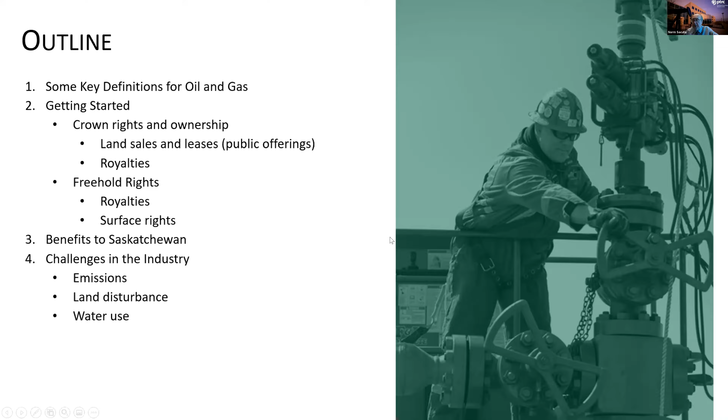So, a few of the definitions. First of all, if you go to the PTRC page, this is a link — we can send this out to people after the presentations are over. We have a glossary of terms at the PTRC.

Now, we've only been working on this for about the last 8 to 10 months. It's been populated with some good definitions right across the industry. So if you ever have a question about something like an oil well, or what is CHOPS — cold heavy oil production with sand — it will be included in this glossary. Just make note of that; you can go to the PTRC page. That glossary will be world class within a year, I promise, but right now we're populating it with material, and it's a good start.

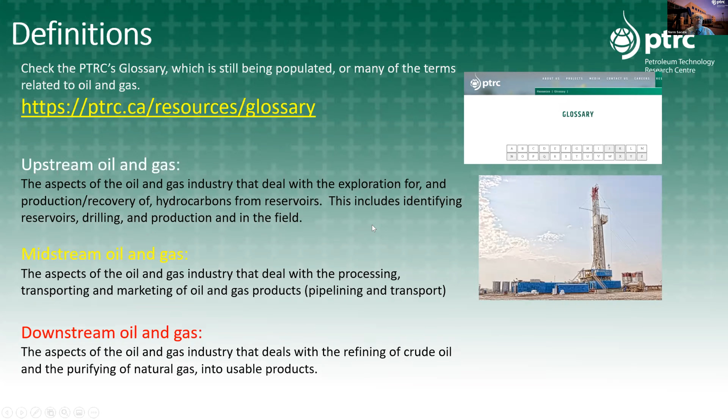So three of these definitions right off the bat are upstream, midstream, and downstream oil and gas. Some of you may have heard these before, but I'll provide a better definition. Upstream oil and gas is the idea of actually drilling the wells — what happens at the wellhead, what happens in the field to get the oil and gas out of the ground. So when we talk about upstream oil and gas, we're talking about exploration, production, and recovery from reservoirs. Midstream oil and gas, you could consider — although it involves other things — to be the transportation of materials.

So how you get that to market, think about big tankers going across the ocean, pipelines - that's midstream oil and gas. How do you get that to locations where it can then be further refined and upgraded? That's what downstream oil and gas is - the refining to finished products, and frankly, the sale of those products.

So when we're talking about upstream, midstream, and downstream oil and gas, which is often discussed across the industry and in the general public, those are the three things we're talking about. The PTRC and I would say SRC are most heavily involved with upstream oil and gas, although SRC, because they're interested in pipe flow and in improving the ability of pipelines to do what they're supposed to, are also involved in a significant way with midstream oil and gas.

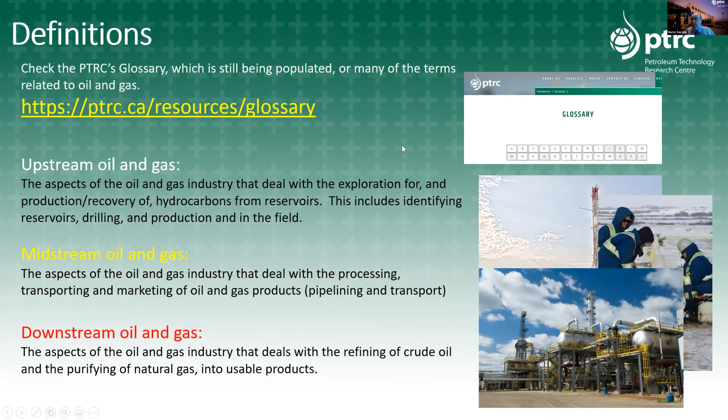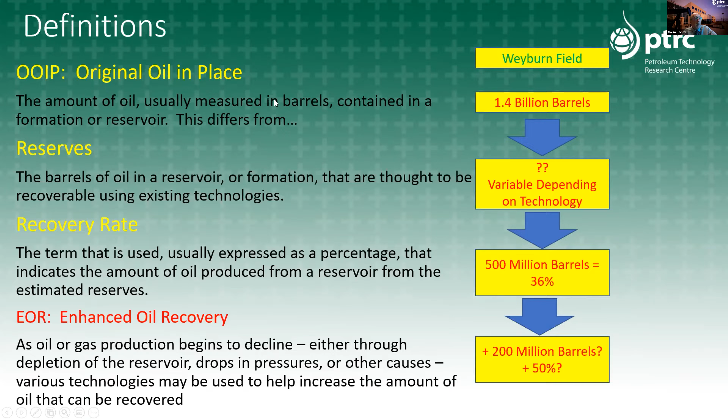So Weyburn has become a really world-class field that is being looked at, and I used it to basically provide examples of what these terms mean, if you're interested in looking them up further. Okay, so let's talk about Crown rights and ownership.

So basically, the government, or Crown as it's called - the provincial government of Saskatchewan - owns the mineral rights to the vast majority of locations in the province. About 80% of the mineral rights, what is underground below your land, is owned by the Saskatchewan government. Now that doesn't just include oil and gas, it includes potash, and increasingly really valuable commodities like lithium. The province is looking more and more at lithium because, of course, it's used in batteries to power cars, things like that. And they are finding lithium in some of the underground reservoirs where oil and gas is, or where there are deep saline reservoirs. That's also being talked about.

There's also helium - that's another commodity that's underground. We actually have a helium production plant now in southwest Saskatchewan because they were able to find helium in some of these underground locations. Now, as I've said, most of those rights are owned by the province, and the province decides to do what's called land leases and sales.

They make public offerings or notices posted at the Ministry of Energy and Resources site, saying this particular section of the province or area is now up for lease or for sale for exploitation, if it hasn't already been put up.

Usually larger companies make these bids, since it's hard for a smaller company to do this when it involves oil and gas. A company bids, saying we want to purchase the rights to exploit this resource and we're willing to pay this amount. The top bidder usually wins. If it involves oil and gas or a large area requiring a lot of infrastructure, pipelines, or pump jacks, it will typically be a larger company.

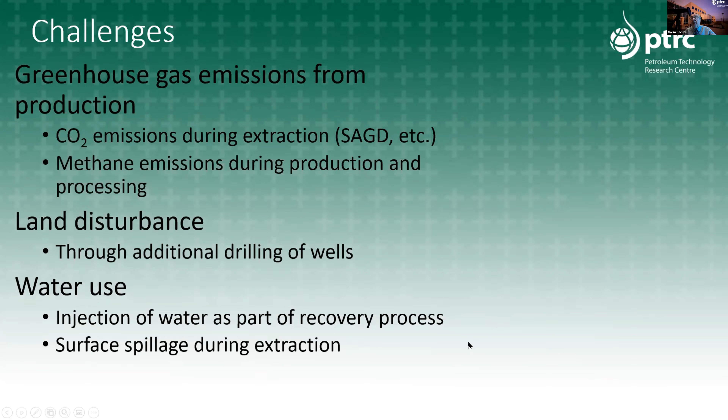Where you are using surface water, to eliminate that entirely would be the ultimate goal, I think, but rather to use water that's used at depth and at other locations. And of course, you don't want any of that very salty water being spilled at the wellhead. So that's another issue that is potentially to be looked at.

So that's it for me. And just a brief summary of what's coming up with the presentations.

Eric Nichols is going to be doing the basics about wells, how they're drilled, what's an oil reservoir, where are oil and gas located, and also touching upon enhanced oil recovery. We have Petro, he's going to be talking about EOR, enhanced oil recovery, and IOR, which is improved oil recovery, and also a number of definitions and other background information and information on the research that's being conducted at SRC.

And finally, we have Erica. She's going to be talking about methane and the research work that's being done at SRC to help mitigate some of those emissions, and also a summary about why methane is a particular problem. So with that, I'm going to stop sharing, and Eric, please go ahead and start with your presentation.

Thank you very much, Norm. I hope everyone can see my screen. I'm going to talk about a little more of the technical stuff than what Norm was talking about. That was a good background. Thank you very much, Norm.

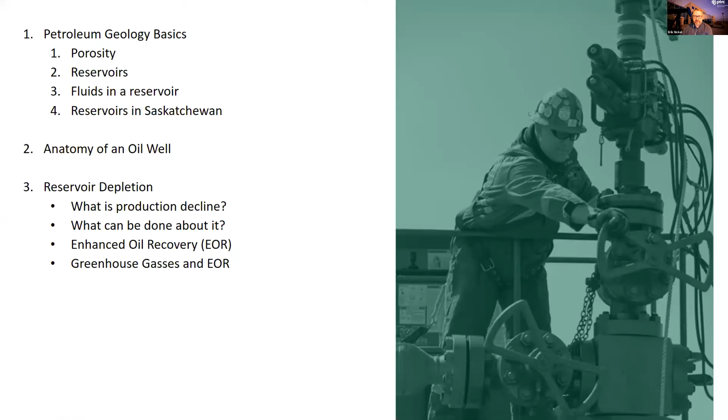Consider this continuing to drink from the fire hose on all things oil and gas in Saskatchewan. So I'm going to go through some petroleum geology basics of porosity, reservoirs, fluids within them, and where the reservoirs are in Saskatchewan, how you drill an oil well and what that looks like in cross-section. Also, reservoir depletion and EOR. I'll touch on EOR. Petro's going to really get into it a little bit deeper.

So reservoir rock. You know, we often talk about rock. I'm a geologist by training. I grew up looking at rocks and talking about rocks. There's different kinds as it pertains to a petroleum geologist. There's the kind that has no pore spaces, real heavy, dense rock. Think of a curling rock or something like that, but more likely a shale, something that fluids can't travel through.

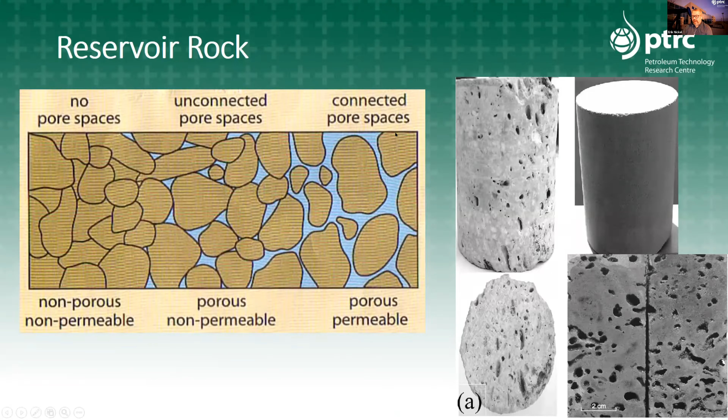But then you have this porous and permeable rock, and that's what you have oil and gas trapped in. If we were to take that little diagram and put it on its side and put oil down here, what you would have is basically an oil reservoir. You have rock that is connected pore spaces and porous and permeable like a sponge right underneath real dense, heavy rock. What does this look like in reality?

This is a core of a limestone that has these big porous holes in it. It looks like Swiss cheese, although it also may look like a sandstone where all the spaces between the grains of sand are all filled with oil.

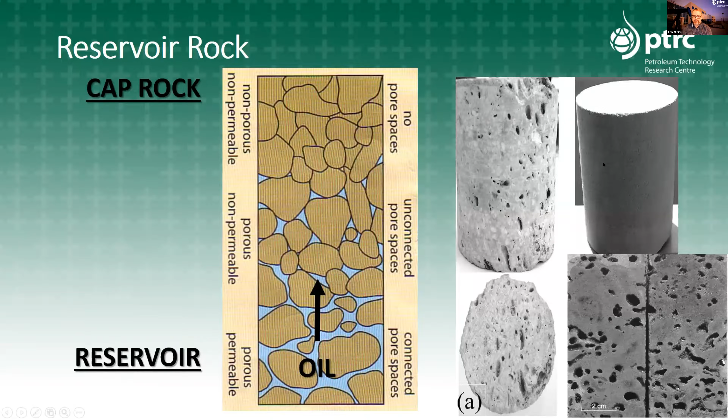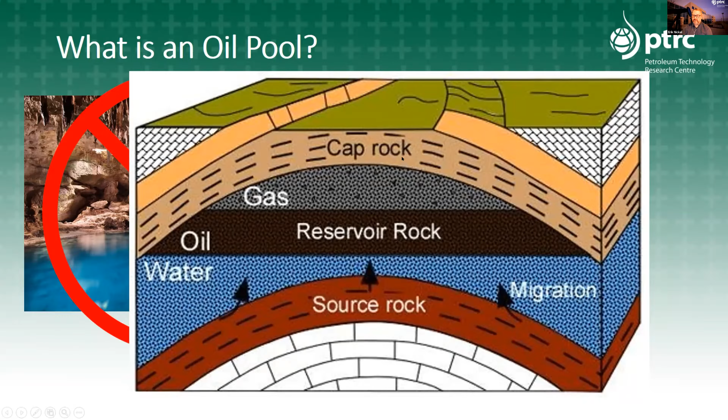So to access that, we have to drill an oil well. At its most basic, what you need to know about an oil well is that you drill a well and cement a metal pipe into it, then drill a bit smaller and cement another pipe into it called the surface casing, then possibly an intermediate casing, and then production casing. Each one is a pipe inside a pipe inside a pipe, each getting progressively deeper, and each using a lot of cement.

It won't flow up to surface usually, especially in Saskatchewan. You need a pump, and you've seen these nodding donkeys in the field a lot, but what you have to know is there's a sucker rod that goes all the way to the bottom of the well, which might be kilometers deep. It's a very long rod, and at the bottom is a valve that allows you to start slowly and gradually bring oil up to the surface, where the gas is separated basically at the wellhead, and you have oil production. So very many pipes and very many long pieces of steel, as I'm sure you've seen in the yards and on the trucks around Estevan, Lloydminster, and Swift Current.

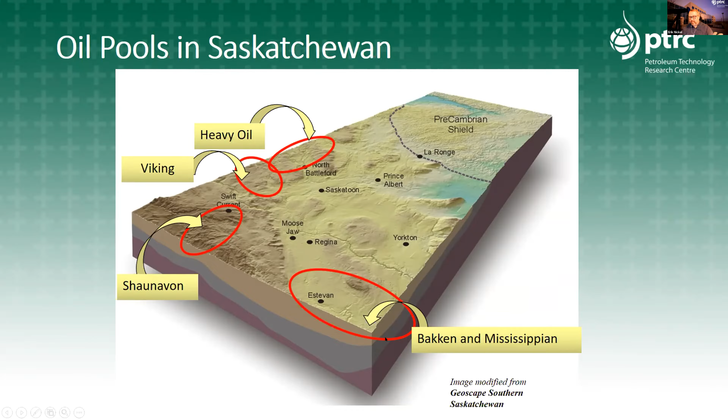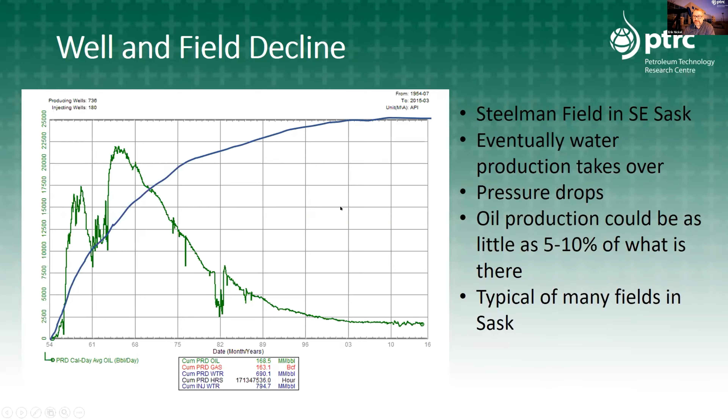And the price per barrel of water is not very good. So all of this water gets pumped back down into different wells trying to get more oil out. In southeast Saskatchewan, we maybe get 20 to 30% of the original oil in place, if you remember that term that Norm told you. But it can be as little as 5 to 10%. So imagine 95% of the oil remaining in this reservoir - what can we do with that? It's typical of many fields in Saskatchewan, be they Bakken fields or up near Lloydminster with heavy oil. So we're leaving up to 95% of it behind.

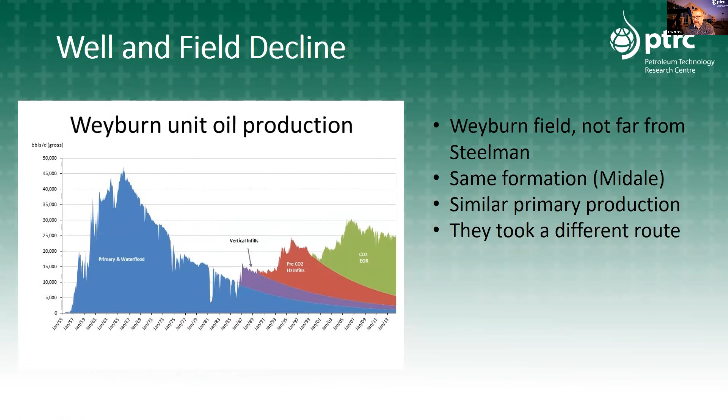They put in infill wells, so that can get you a little more production. They started horizontal drilling—a big technology I was involved in during the earliest days, in the mid-90s, to drill horizontal wells at Weyburn, and that increased production. But most importantly, they used enhanced oil recovery with CO2. Right now, although this graph is a little old, they're producing oil at a rate not seen since the mid-1970s, and helping the environment while they do it. So we're going to get into a little more detail on that.

What is enhanced oil recovery? When a field has declined and isn't producing much anymore, you'd have a setup of injection wells and production wells—Petro's going to get into much more detail about this—but you might inject water into an injection well to push more oil towards a production well. That's the cheapest and most basic method. If you want the water a little thicker, you could add a polymer, which makes the sweep more efficient. You could also add a surfactant, which is a fancy industrial term for soap. Soap, just like it does on your dishes, will clean grease and oil out of a reservoir in the same way.

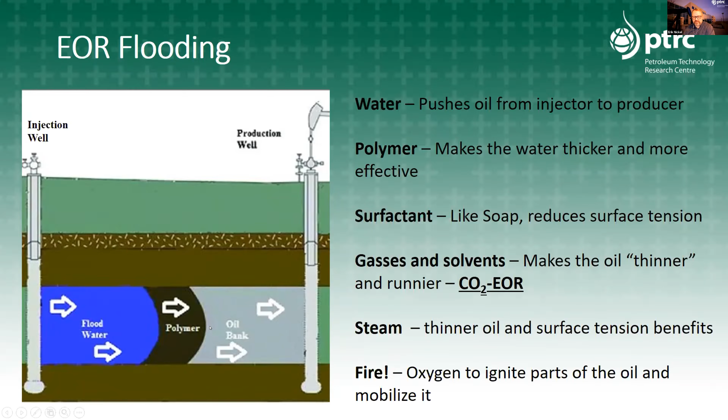CO2 EOR falls under gases and solvents. You inject a gas—maybe methane, maybe CO2, maybe a combination—and it changes the composition of the oil to make it thinner and flow better to the production well. You can also use heat-related technologies like steam. You've heard of SAGD and probably seen those big steam generators near Lloydminster. That thins the oil and creates better surface tension, a term Petro will explain in more detail. You can also inject oxygen, light the reservoir on fire, and essentially burn it to drive hot oil towards the production well. There are lots of methods like this, but it has to be economic, optimize production, and not harm the environment—in fact, improve it.

We talk a lot about CO2 at the PTRC, and about tons of CO2 captured from places like the Boundary Dam power plant, but also cement plants, fertilizer plants, or ethanol plants. What does a ton of CO2 look like? Well, a ton of CO2 is about the size of a small house—a 27-foot cube of CO2 is a ton. You and your family, and me and mine, most of us here, create about 7 to 8 tons of CO2 per year just as our natural footprint.

But we can take that CO2—if we capture some of what's used from power, for example at the Boundary Dam power plant—and start using it to inject into an oil reservoir. One ton of CO2 at Weyburn creates 3 extra barrels of oil beyond what we'd have gotten otherwise. Now you're saying, okay, but don't those barrels of oil create more CO2? Yes, indeed they do. Each barrel will have about 400 kilograms, about half a ton, of CO2 when it's refined and used. But this is a much lower intensity than any other oil produced. It's a fairly complicated calculation, but one that makes sense. If you're interested in more detail, I encourage you to Google Azzolina 2016, who wrote a paper called 'How Green Is My Oil,' which ranks different production methods by their carbon intensity. CO2 EOR is one of the lowest intensity methods of improving oil recovery.

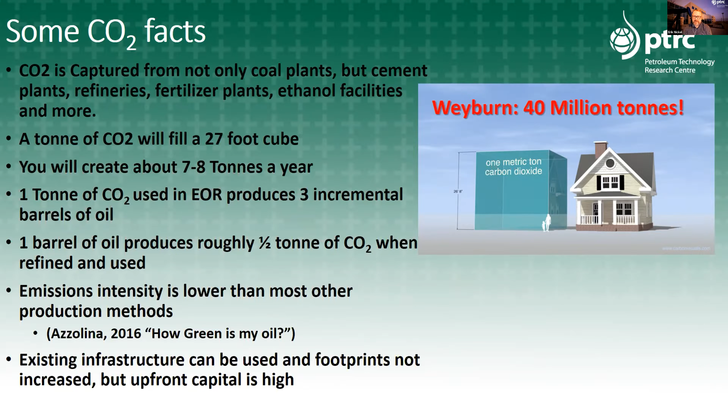One of the benefits is that existing infrastructure—the wells, tanks, and all of that—can be used. We don't need to drill that many extra wells or disturb more land. Upfront capital is high though, and it's a very serious calculation to make when entering into a CO2 EOR scheme: is it going to pay off in the long run? Often payoff isn't for years. It's a big problem we have to solve.

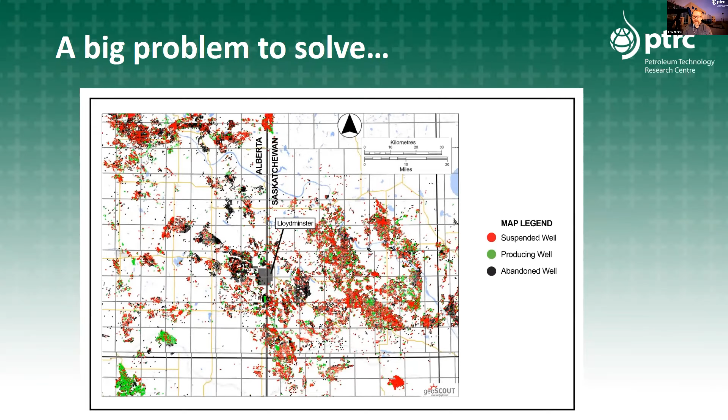So some of the takeaways from my presentation: don't think of oil pools as underground lakes. Think of them as sponges of rock. Oil wells can be complicated things. Think a lot of cement and a lot of tubes inside of tubes, and highly technological things. Oil production declines in a pretty predictable way, and we're here to try to keep that from happening.

We can do that with enhanced oil recovery using CO2, which can help satisfy some greenhouse gas goals while helping our economy and protecting the industry. Many wells in the province are ready to use this, but it has to be economic, and it has to be made economic. And we're looking for ways to do just that.

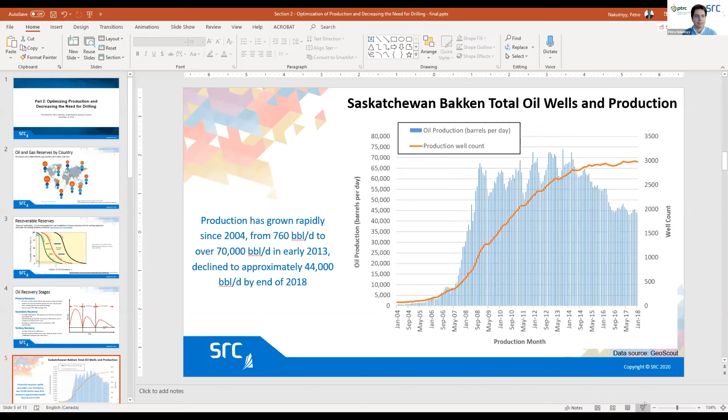Okay. So as Eric introduced you to some of the basic concepts, and he spoke about some of the EOR methods, I will get a little more in detail. I'll try not to bore you with too much detail. I tend to get excited about these things, which my wife does not understand, but it's a chance for me to introduce a more general audience to some of the concepts.

Before I get into enhanced oil recovery, I just wanted to introduce a couple more terms. And the first term is oil and gas reserves. So what I wanted to point out here is Canada has the second or third largest reserves of oil in the world, and so we're sitting on a tremendous resource here that we can use to our benefit and to the benefit of people around the world.

And there's a lot of science that goes into oil recovery. Another term that I wanted to introduce you to is recoverable reserves. So just because we have the oil under the ground does not mean that it can be produced easily. The oil in place is always much higher than what is technically feasible to recover, and that's even yet higher than what is economically feasible. So as Eric mentioned before, sometimes up to 95% of oil stays in the ground. That's because it's either technically or economically unfeasible to recover.

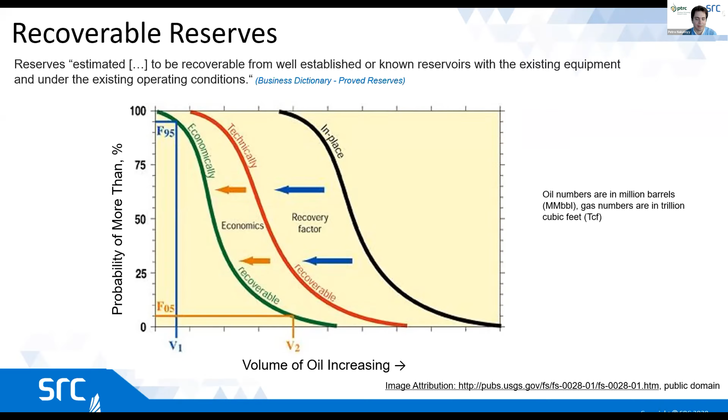And so at SRC, as well as universities and many other researchers in Canada, we are trying to find ways to recover that oil while reducing the environmental impact.

So there are three different main stages of oil recovery, and again, you have seen that on Eric's slides for Weyburn Field and others. When we're just starting to produce oil from a particular field, we call that primary production. That is done by using natural energy of the reservoir. We drill a well, and sometimes there's enough pressure that the oil comes out on its own. Most of the time, especially in Canada, we have to pump it out, but we do not need to inject or do anything else about the reservoir.

So it's basically just sucking the oil out of that sponge that Eric was talking about. And again, we can get up to 30% of oil in the best case scenario, but more often it's more like 5 to 10%. Second step, again what's been done a lot in Saskatchewan, in Canada, in the world, is secondary recovery, where we inject water to maintain pressure and chase that oil out. And then once that's exhausted, when we produce mostly water, we go to tertiary, where we try to do something different, such as injecting soap or heating the reservoir, again to produce even more oil.

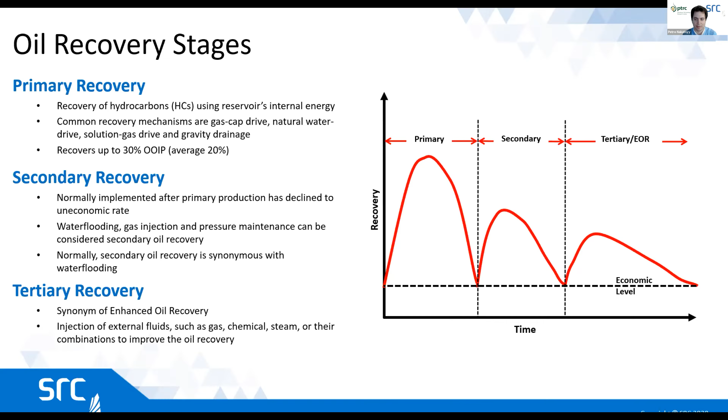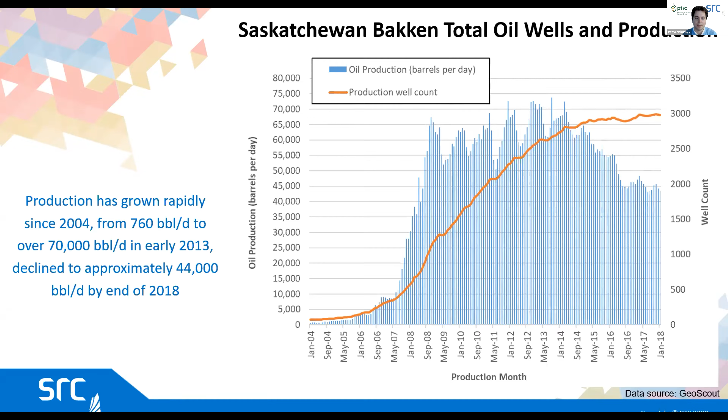So why is this important? Well, again, Eric talked about significant decline in production. A lot of fields in Saskatchewan are mature. A lot of wells are suspended. Right now, for example, for Bakken, most of the production is through primary. And we keep on drilling new wells, but even though the number of wells is going up, this orange line, the production has started to decline. So the problem is not only leaving oil in the ground, but also having to drill more wells.

So what can be done about that? Well, there's several ways. You can try to improve production by optimizing the current existing pumps, pumping methods, drilling methods, like drilling longer wells, horizontal wells, drilling more wells from one pad, which minimizes land disturbance. But it could also inject different fluids or energy into the reservoir, which would then constitute enhanced oil recovery. And again, that could be gas, could be chemicals, could be steam, even microbes.

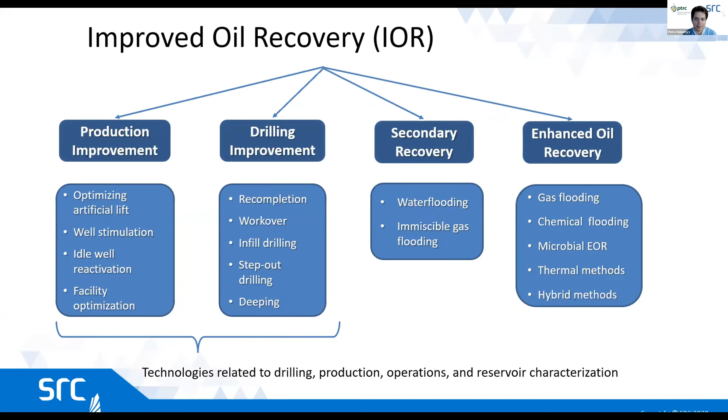It's a couple of things I wanted to mention about primary depletion. You've heard us use the term cold heavy oil production with sand, or CHOPS. This is where we allow some sand to be produced from the reservoir. Some reservoirs are not very consolidated, so when you produce oil, you get some sand out, and that creates conduits called wormholes, because they look like that. They can be up to 100 meters long and a few centimeters in diameter, and that allows us to access oil from further away, but it also makes it more difficult to produce oil at the end of primary.

Another method you've probably heard about is introducing fractures, that is injecting water, most often water and sand, creating small fractures around your injection and production wells, allowing you to access the reservoir. This is usually done in very consolidated rocks, so they look almost like a granite countertop that you cannot get the oil out of other ways.

So what are some of the enhanced oil recovery methods, or how can we produce more oil from existing wells? This would be an ideal scenario if you don't have to drill more wells, minimize land disturbance, and use the resource that we have.

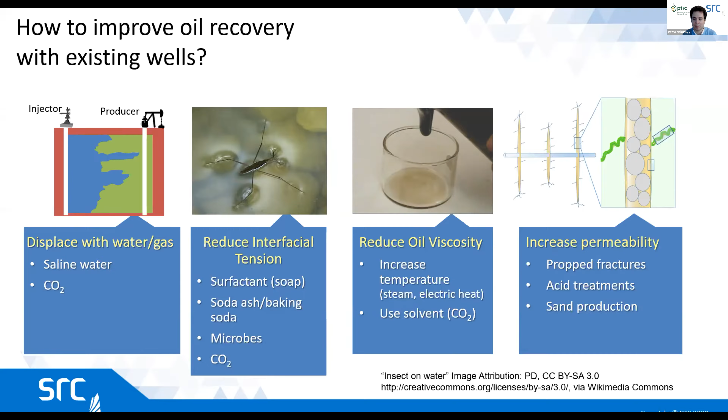You've seen in my previous slide, and also in Eric's presentation, that we talk a lot about CO2. That's not only because we want to reduce environmental impact by putting CO2 in the reservoir, but also because CO2 is actually pretty good at recovering oil. Weyburn Field is one of the good examples. The reason it's good at recovering oil is that it can dissolve in oil and swell it.

If you've ever opened a pop bottle after it's been shaken, you know it introduces a lot of energy. That's what can happen in the reservoir too. If you inject CO2, pressurize it, and then basically open the bottle, it can all come out, both CO2 and the oil, although some CO2 will stay in the ground.

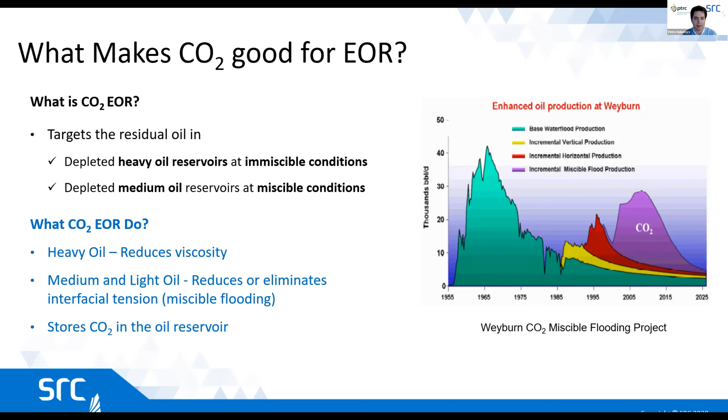There are different ways of introducing CO2, depending on pressure and temperature. There are two main processes that could be used with gas or water to add energy to the reservoir.

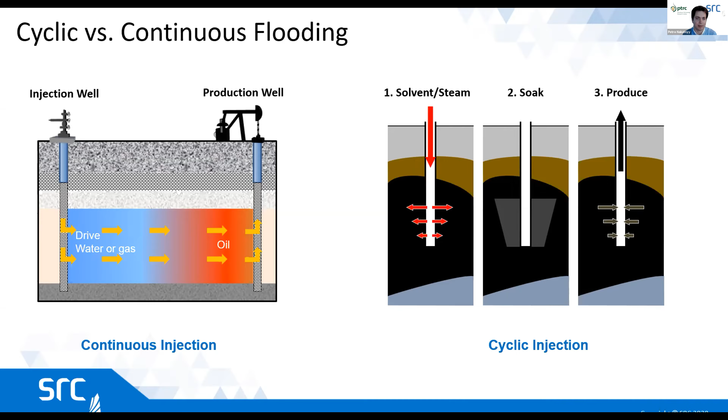One is cyclic CO2 or gas injection, where we inject, then soak, then produce. In this case, we produce back the majority of the CO2 that's injected, but it can be re-injected one more time, and at the end of the process it will stay in the ground. The flooding process is continuous flooding, where we inject in one well and produce from the other. This way we can store more in the ground because you don't produce the majority of the gas. That's what's being done in Weyburn and other places.

So, thermal processes. A lot of oil in Saskatchewan is very heavy. You can see this image on the top right of my screen.

The oil does not flow very well. It's almost like molasses. In fact, some of the oil is really heavy at room conditions. It looks like bitumen, a paste. It will not flow, so we have to warm it up in order to be able to produce it.

Typically that's currently being done by steam. You would have seen some of the boilers, and perhaps you've heard about steam-assisted gravity drainage. So a lot of research is going into how to reduce the amount of steam or energy we need to add to generate steam, because most of the steam is generated by burning natural gas, and that produces emissions. So one way is to co-inject the flue gas, the CO2 produced during steam generation, into the reservoir.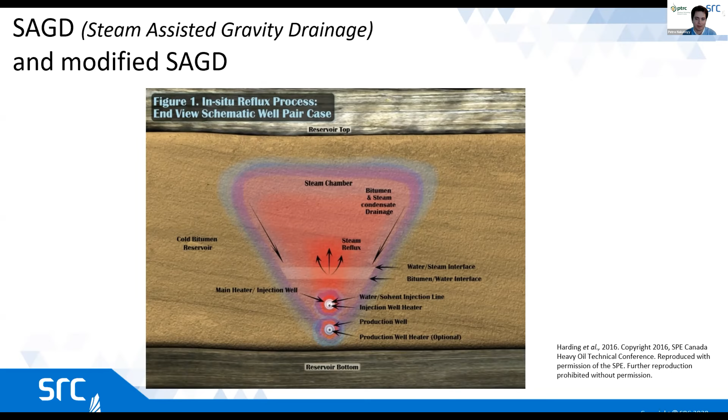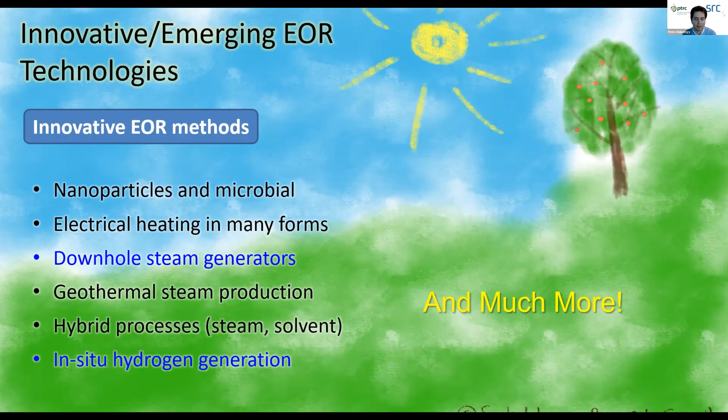So what else? There's a lot of other innovative ideas: nanoparticles, microbial, electrical heating. I already mentioned downhole steam generators, using geothermal energy, a variety of hybrid processes, or even generating hydrogen in situ - you can actually break the oil down into hydrogen and other gases, and then produce only hydrogen. That's what Proton Technologies is trying to do right now. So there's a lot that can be done, and a lot of bright minds are looking into this in Saskatchewan.

So this is my last slide. If you were to set out to design an effective EOR process and reduce environmental impact, how would you do that? Well, it's important to be able to use existing wells and design a process that can produce more oil from existing wells, existing fields, so we don't waste that.

Again, use solvents instead of heat. Sometimes you can also use chemical additives that reduce the amount of steam and energy you need to input. If you have to produce CO2, inject it into the reservoir - that could be CO2 you generate, or CO2 from a chemical plant, or from a power plant. That's what's being done at Boundary Dam. And understand the reservoir and the process through geomodeling, laboratory modeling, and simulation.

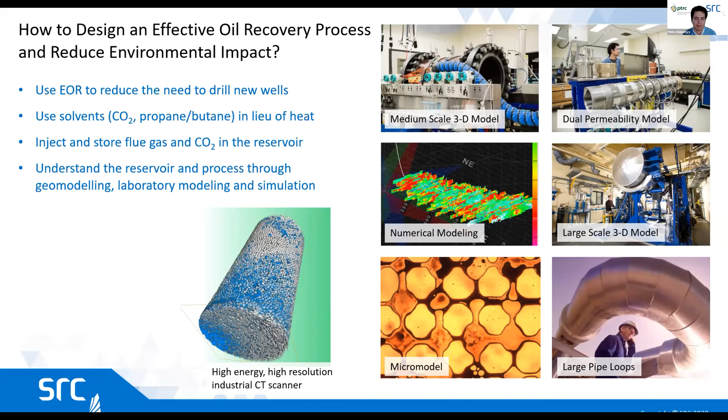On the screen here you see some examples of the physical models that we use at SRC to try to understand the reservoir, test the processes, and accelerate development of new ideas such that they could be used in the next few months or years to reduce the impacts and maintain oil production in Saskatchewan. So that's it for me. Thank you for tuning in.

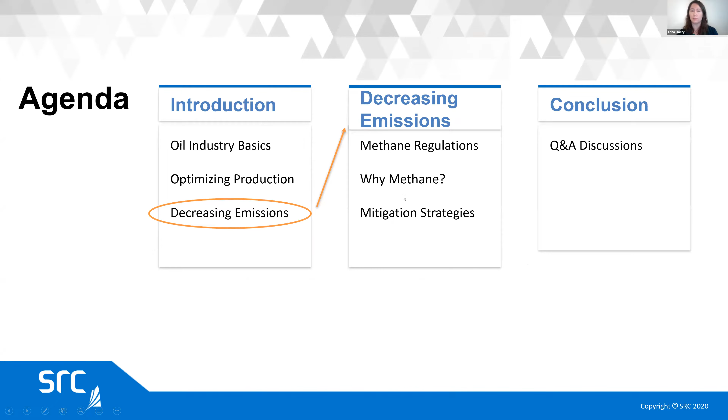Okay, thank you Norm. So I'm Erica Emery, I'm with the Saskatchewan Research Council. As Norm mentioned, we're at the last portion of the presentation. I'm going to briefly touch on methane regulations - in the interest of time I'll skim through those quickly. We'll talk a little bit about why methane is the focus for oil and gas, and some different mitigation strategies.

So methane regulations are both federal and provincial. Federal regulations are through the Minister of Environment and Climate Change Canada. The big takeaway here is that they have a goal of reducing methane emissions by 40 to 45% below 2012 levels. The Greenhouse Gas Pollution Pricing Act was introduced in 2018, and that's the carbon tax I'm sure you're all aware of. It started at $10 a ton, increasing by $10 per year, started at $20 per ton of carbon dioxide equivalent, to hit $50 per ton in 2022.

And there was a recent announcement in the news about the intention to increase that price even further. In November, it was also announced that Saskatchewan, Alberta, and BC have all reached equivalency agreements on provincial methane regulations, so the regulations of those provinces apply in place of the federal regulations. Saskatchewan's regulations are put forward in the Methane Action Plan, part of the Prairie Resilience Climate Change Strategy.

The Oil and Gas Emissions Management Regulations, OGEMR, is the program, and we can send out a link to that if anyone wants more information. Again, the main takeaway is the goal to reduce methane emissions in the oil and gas industry by 40% between 2020 and 2025. It sets a specific target of 4.5 million tons of CO2 equivalent annually.

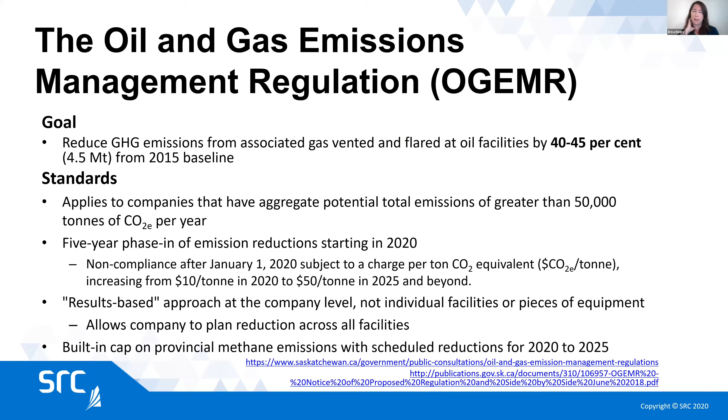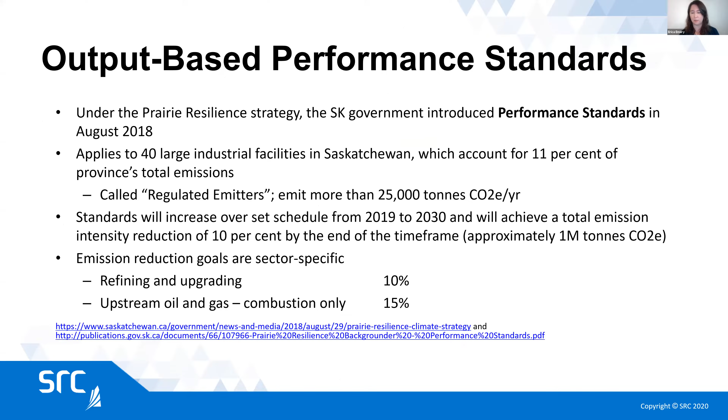Also, as part of Saskatchewan's emissions regulations, there's the output-based performance standard, which applies not just to oil and gas, but to all large emitters in the province. I am going to just move quickly past that and start talking about methane.

You might wonder why I'm focusing so much on methane when this is the emissions reduction talk. Well, methane is a part of oil and gas production. So as Eric and Norm showed you in their presentations, an underground reservoir contains oil, but it also contains water and it also contains natural gas. The amount of each one is dependent on the formation, the age, geology, history, a lot of factors that we're not really going to go into.

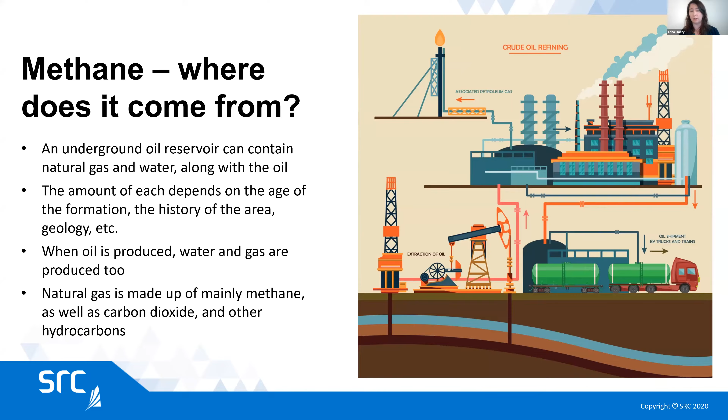But the important thing to know is when you're producing that oil, you're not just producing oil, you are also producing the water and the gas. Natural gas or produced gas in Saskatchewan is mainly methane. There can be a little bit of other contaminants in it. So sometimes there's going to be carbon dioxide, there's going to be some higher hydrocarbons, there might be some H2S or sour gas.

The key sources for emissions from oil and gas production, there's several of them, and they have varying degrees of importance. You may have heard us talk about fugitives. Fugitives are an unintentional leak that's coming out somewhere along the process that perhaps the producer is not aware of. There's also production venting, which is something that the producer is aware of. So they're producing this gas and they're separating it, and they're either venting it or flaring it. They know that gas is there.

There's also venting from pneumatic devices. So instrumentation, some different valves operate using compressed gas to open and close, and those will all vent gas as part of the normal operation. There's venting from compressor rods, and there's also venting associated with fracking.

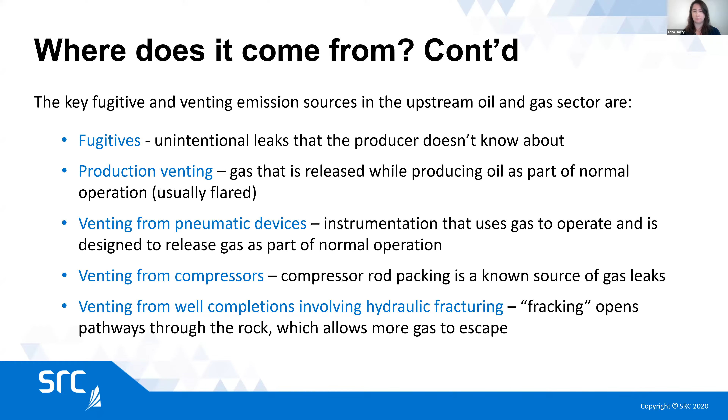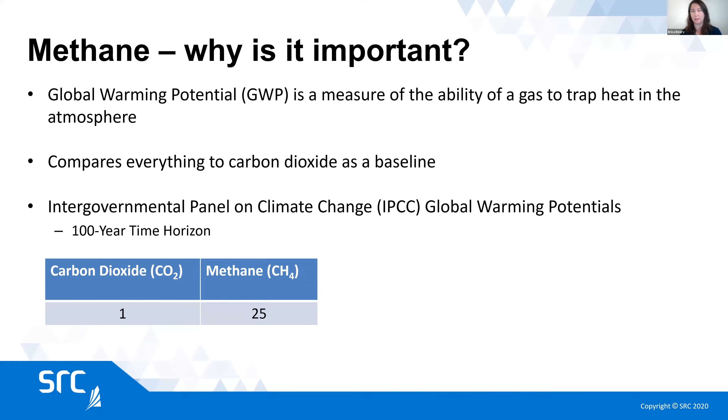Let's come back around to why methane. Methane has a global warming potential of 25 times that of carbon dioxide. I won't spend too much time on that.

We'll move right on to what can we do about it. Well, if you think back, I mentioned there's several different sources of methane and they'll have different mitigation strategies depending on your source. When we're looking at fugitives or those unintentional leaks, you want to apply leak detection and repair.

There's different methods of doing leak detection and repair. Because methane is a gas, it's difficult to detect just from walking around and looking, but there are fixed gas sensors that you can install. There are optical gas imaging cameras that you can send out with an operator into the field and use this special camera to see where the methane is leaking. You can also attach sensors to mobile technology, such as on a truck or on a drone.

But that takes care of the fugitives. Pneumatics, as I mentioned, emit gas as part of their normal regular operation. There are things you can do about that. There is replacing your higher bleed pneumatics with newer, lower bleed pneumatics. You can also go to electric operation on your site so that you don't need to use pneumatic valves anymore. You're using electric valves, electric actuators.

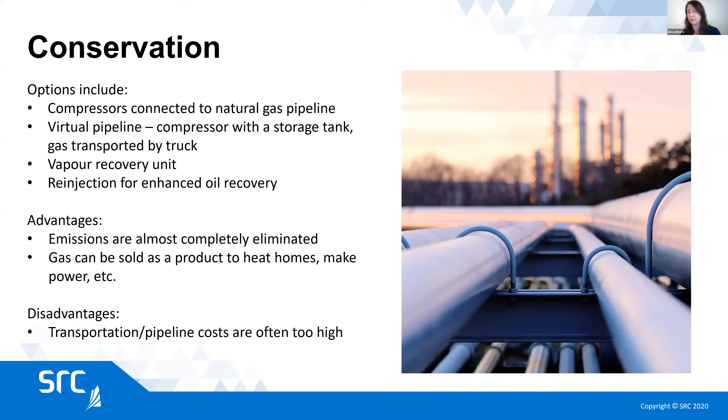Disadvantages: often transportation costs are too high. So if you are operating your well and it's producing gas, but you're a long way away from any existing pipelines, to build that infrastructure, to build that pipeline for a long distance to connect to existing infrastructure is going to cost more than the value of the gas that you can sell. And as we looked at too, the production decline curves are such that by the time you build up this other infrastructure, your gas production might have dropped off.

Another popular option for dealing with methane is combustion or flaring the gas. It can be done with a flare, an incinerator, enclosed combustor, or catalytic combustor. There are different options here, but they all accomplish the same goal, which is to burn the gas. This doesn't really seem like a good mitigation option, but if you think back to that 25-to-1 ratio of the global warming potentials, it does help from an emission standpoint because you're converting higher emission methane into the lower global warming potential carbon dioxide.

Combustors, flares, and incinerators are fully commercial. They're available, they're out there right now. They're 99% efficient in general, can be quite low cost, and can handle a range of gas types. So if you have a clean, high methane gas, or a contaminated gas, it will still burn. Some of the main disadvantages is that you're not producing anything, you're just burning the gas to get rid of it. And a lot of the regulations coming out are specific to venting, but some mention venting and flaring, so it's not necessarily something that will continue long into the future.

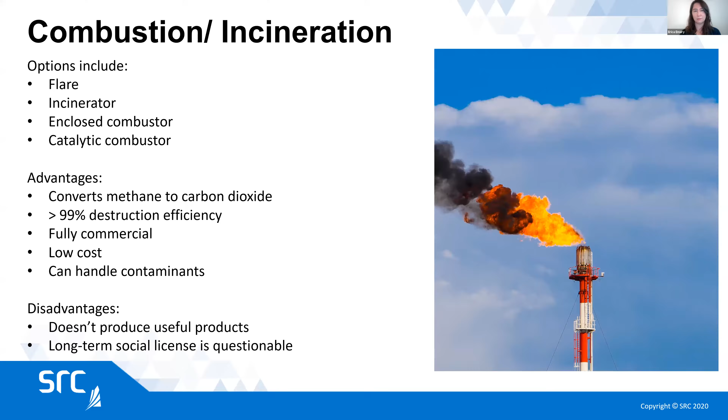So if you don't want to burn your gas and you can't connect to existing pipeline or infrastructure, what are some other options? You can convert it. Converting to power is one that has been gaining a lot of interest lately. SRC has done some work on this in the past and is currently involved in a study right now. There's a lot of different options technology-wise when it comes to converting gas to power.

There's combined heat and power engine generator sets that you've probably experienced in other areas. And then there's smaller scale versions of things that exist at large scale, like a microturbine compared to a regular steam turbine, organic Rankine cycle, thermoelectric generators. There's also emerging technologies that I didn't really mention, such as fuel cells.

Some advantages: you are producing a saleable product. You're producing power, which you can either use to offset your own power use on site or potentially tie into a grid, depending on the location. These gas to power technologies tend to be relatively small. They're scalable down to individual wells in some cases, or into multi-well batteries in other cases. And it's generally familiar technology, engines, generators, things that our operators know how to deal with.

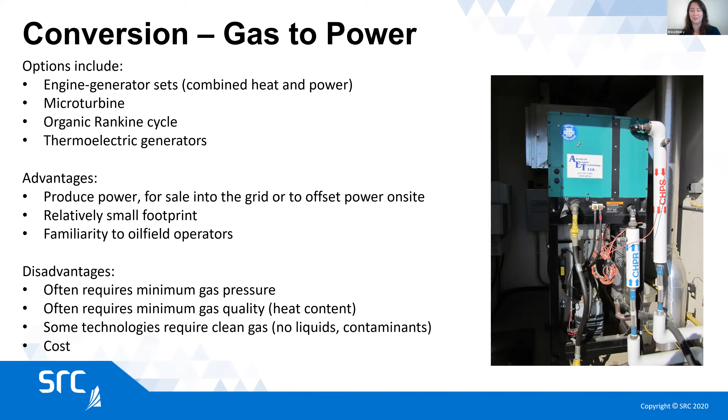So there are some disadvantages. Often they require some kind of gas pretreatment. The gas has to have a minimum heat content, a minimum pressure. They can't handle contaminants. And of course, cost is going to be the story throughout the disadvantages of all these technologies.

We can also convert gas into liquids. There are several different processes for converting gas to liquids. It can be converted into longer hydrocarbon chains, so into a fuel like diesel, gasoline, or jet fuel. It can also be converted into completely other chemicals: methanol, dimethyl ether, ammonia, formaldehyde. They all have different processes, but they have some similarities.

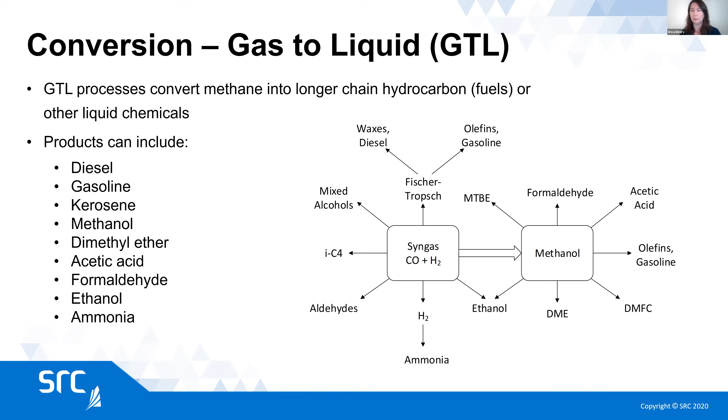They all produce liquid fuels or chemicals, which can generally use existing infrastructure. So if you're already pumping oil away from your oil well, and you can produce more oil, more gasoline, or more diesel, then that's quite easy to handle and deal with.

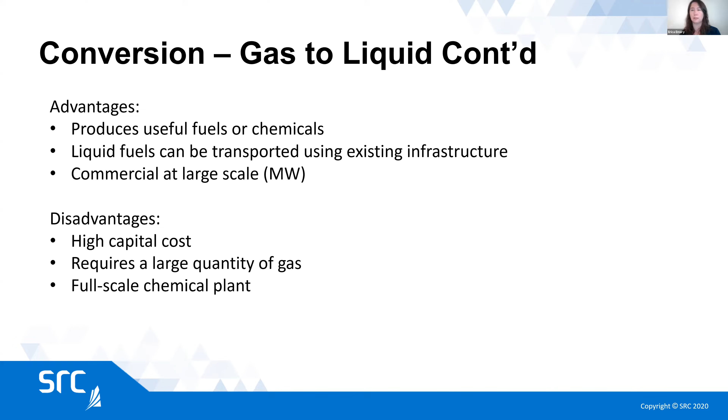To summarize quickly, methane regulations are in place with the goal of reducing methane emissions from the oil and gas industry by 40 to 45%. Methane mitigation strategies include leak detection and repair, pneumatics replacement, conserving the methane, combusting the methane, producing power, or producing liquid fuels and chemicals. All of these have their different advantages and disadvantages. SRC is working with producers and technology companies to reduce emissions through our Center for the Demonstration of Emissions Reductions.